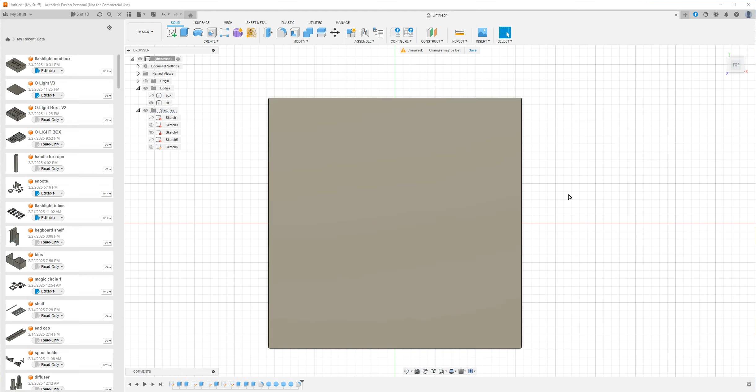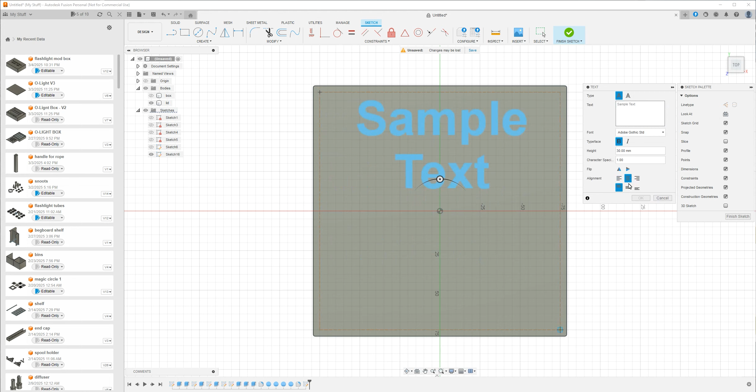So let's add some text to this lid that I just finished up. So what we're going to do is create a sketch on whatever surface you're putting your text on, then create text. I like to fill the area with the text box because that way I can take advantage of the formatting. So center and center is really easy. Let's go

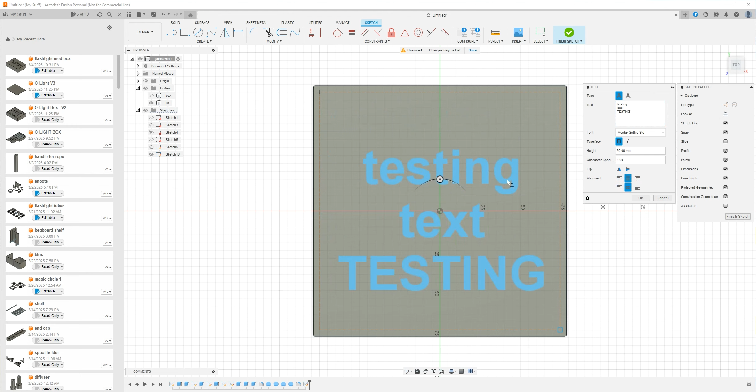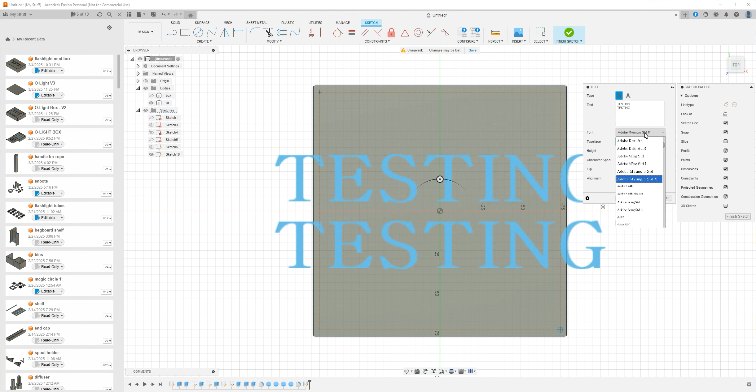3 lines. Now you'll notice that even though I am centered, it doesn't look centered because the software handles text really, really weird. And what's really confusing is if you change fonts, you'll find that the sizing and the leading can change considerably.

I usually go with Arial Black. Let's try 20. Yeah, 20 is good. And you'll notice now it's actually centered. So sometimes just changing your font can fix that problem. Anyway, it doesn't always happen.

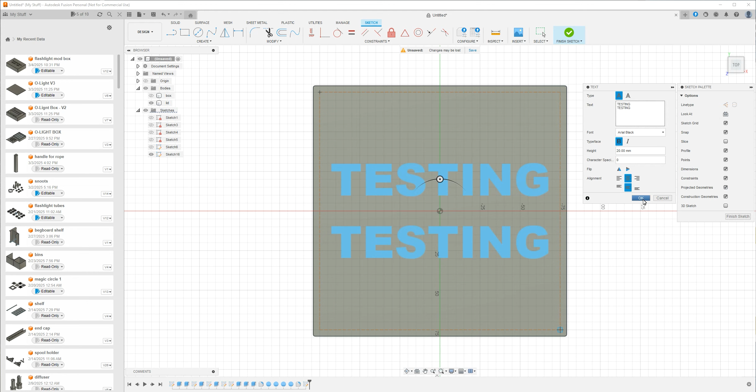So, character spacing, I'll play with this sometimes. You can use this to make your spacing wider to fill the space up. Usually it defaults to 0. If I'm using a smaller text, smaller fonts, I'll give it some spacing so there's a visual gap. Anyway, so let's say, okay, finish sketch.

The next thing you want to do is extrude the text down into the surface. The extrusion depth depends on your layer height. If you're doing a 0.2 layer height, then you want to extrude it down 1 layer. I find that works best for me. I usually print the text against the build plate, so 1 layer works great. If the text is away from the build plate, you can go as deep as you want.

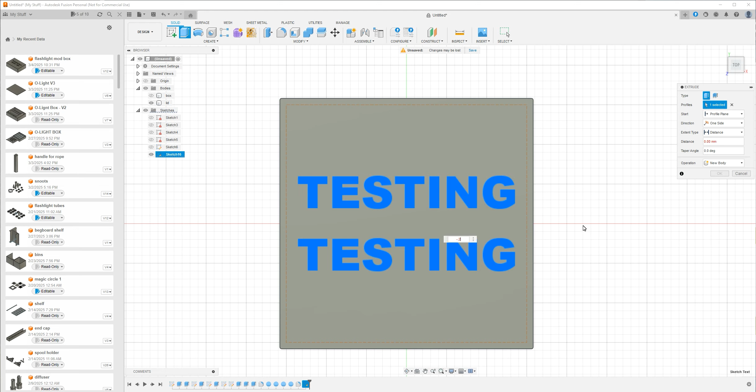So the next thing is to extrude it. You want to pick the text first, and then you want to extrude. For some reason, if you try and extrude first and then pick the text, you wind up picking the surface behind it. So let's hit E for extrude, and you go minus 0.2, and you can see it's

cutting in quite nicely. Make sure that's on cut. Hit enter, and there you go. That's all there is to it.